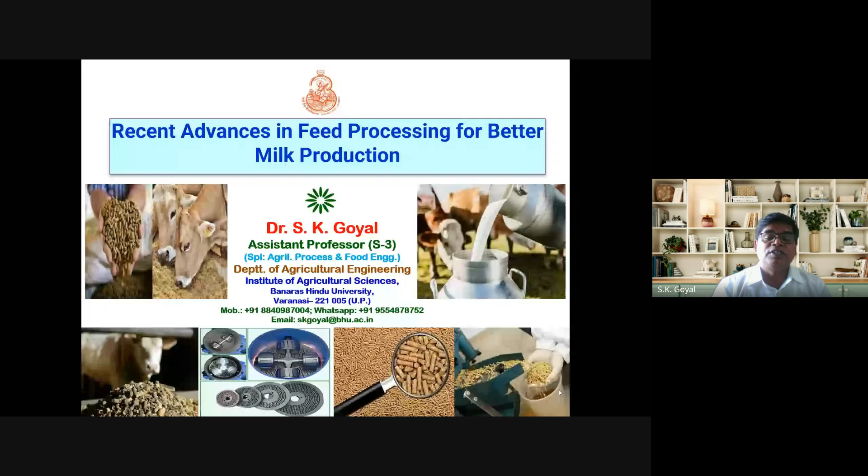As Dr. Anuradha told about my career, I am Dr. S.K. Goyal, working as assistant professor in the Department of Agricultural Engineering. In BHU, this department is known as farm engineering, and my specialization is agricultural processing and food engineering. I will be discussing some techniques of feed processing, how we can process feed for better consumption by cattle and other animals.

In this, I will be discussing animal feed technology, the history of feed technology, what development has taken place in India regarding feed technology, and the specific objectives of feed technology. Then I will also cover types of mills and mixers, and important machines covered by animal feed processing technology. Then a special technology known as pelletizing, then forage processing, and at the last the take-home message, the conclusion of my talk.

As I told you, India ranks first in milk production globally, and about 25% of global milk production was provided by our country during 2021-22. The milk production of India has registered about 58% increase during the last 9 years, because a number of changes are happening in our dairy industry, including feed technology, milking technology, and many other advanced technologies. That's why this huge 58% increase has been recorded. Between the years 2014-15 and 2022-23, it increased to about 230 million tons, in the year 2022-23.

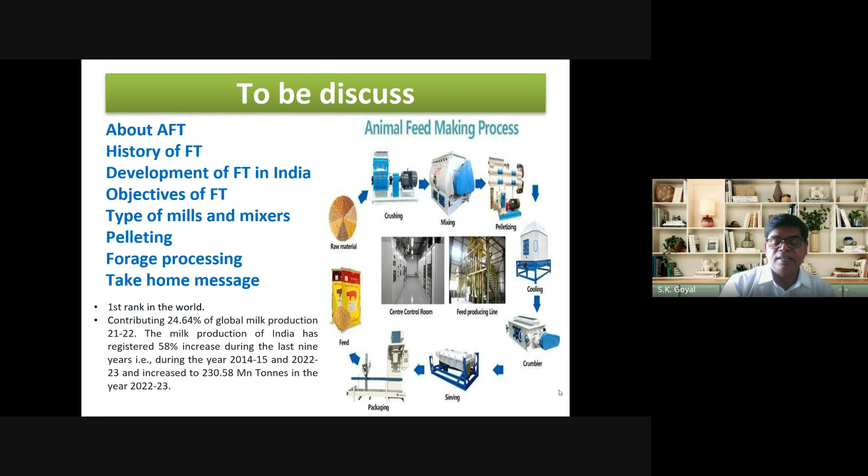So this is an important data, which is the base of our today's lecture. So let's start. What is AFT?

AFT means animal feed technology. We can define AFT as the application of physical, chemical, biochemical, biological, and engineering techniques to enhance the nutrient utilization of feeds and fodder in animal systems, meaning livestock and other things, improving the health and productivity of livestock. When we supply good feed to the animals, then definitely the health of that animal will be better, and only a healthy animal or cattle can give you better milk production.

Feed is the largest single item of expenditure in animal production. This is also an important thing. When we are talking about inputs of any production system, and when we are dealing with livestock and cattle or any productive animals, here we are talking about milk production. So feed is also a very large single item of expenditure. We, or dairy owners, are expending a huge amount for the feed of their animals.

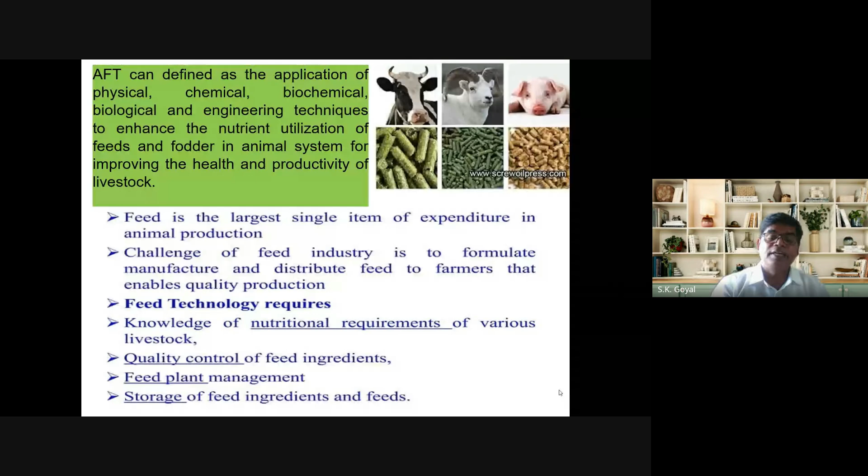Now, if we are discussing the history of feed technology, mills were first built for grinding wheat and maize for human consumption, not for livestock. In ancient times, generally grains or other consumable items were ground with a simple chakki, between two stone parts.

After some time, when the technology advanced, these mills were used for grinding maize especially, and waste material was dumped into the river at that time. That waste material may be converted into nutritional food using some advanced technologies. And chemical analysis gave good results, hence it got market value.

But there was variability in cost of product and quality of product, which led to the formation of AAFCO, that is the Association of American Feed Control Organization, which defined more than 230 different ingredients acceptable for sale in 1969 in the US.

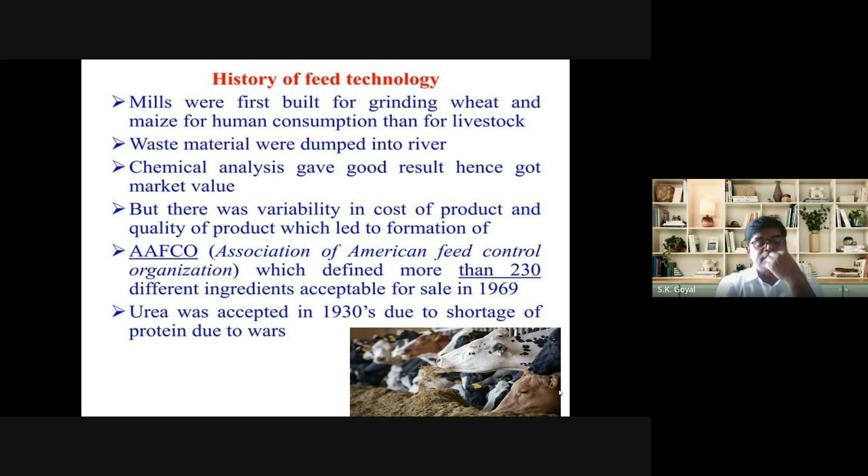Then urea was accepted in the 1930s due to shortage of protein due to war. So urea was used as an important ingredient for this feed system at that time.

As I told you, this is the definition. The subject of feed technology, which we are discussing at present, deals with processing of feeds, fodders, and preparation of formula feeds. As you all know, formula feeds means there are some specific requirements for any particular animal or breed. So when we are preparing some specific type of feed, that is known as formula feed, for which the knowledge of nutritional requirements of various livestock and poultry - I am talking about all animal types - quality control of feed ingredients, feed plant management, and storage of feed ingredients and feeds are essential. So all these words together create a definition of feed processing.

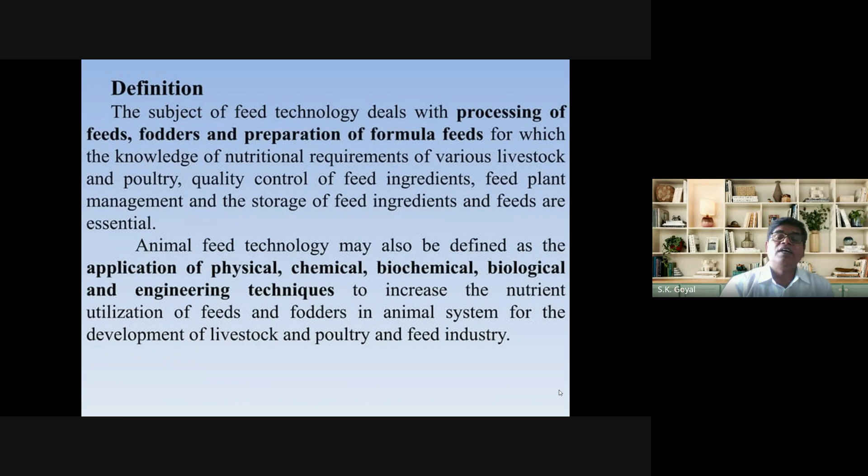There are a few facts about the beginning of the feed industry and related activities in the US, and I will also be discussing our country. In 1875, Mr. John Barwell initiated the production of calf meal at Blatchford of Waukegan, Illinois.

The American Feed Manufacturers Association, AFMA, was founded in 1909 in Wisconsin, and its name was changed to American Feed Industry Association, AFIA, in 1985. So there were some changes that happened from 1909 to 1985, and they changed the name of that organization. The Association of American Feed Control Officials, AAFCO, was also established in 1909.

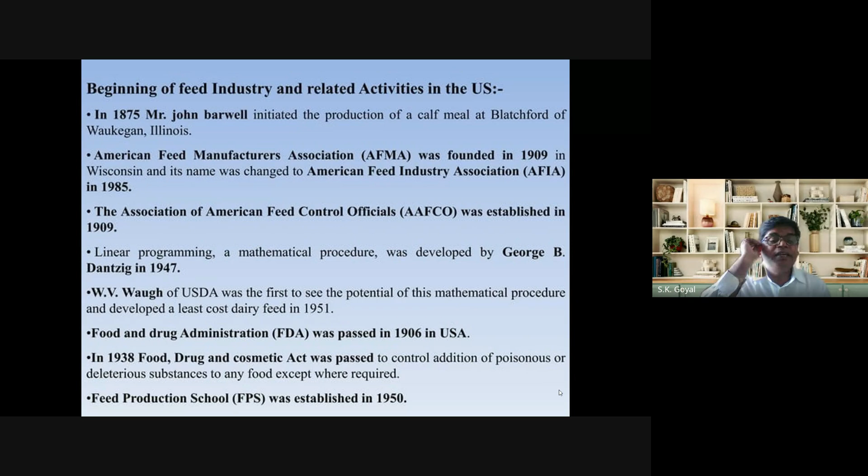The linear programming mathematical procedure was developed by George B. Dantzig in 1947 for the preparation of feed. Mr. Waugh of USDA was the first to see the potential of this mathematical procedure and developed a least cost dairy feed in 1951.

So I am just giving you the simple facts in bullet form.

Dr. Sunil sir, you are not audible. Is there any problem? No sir. Now it is okay, sir.

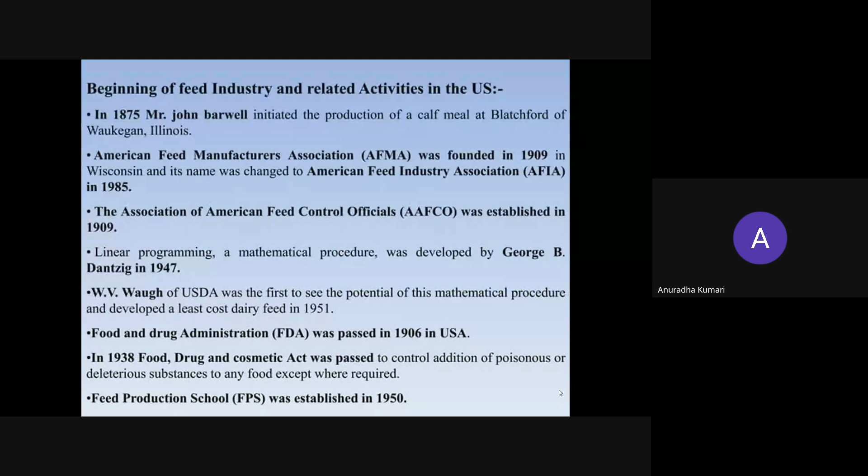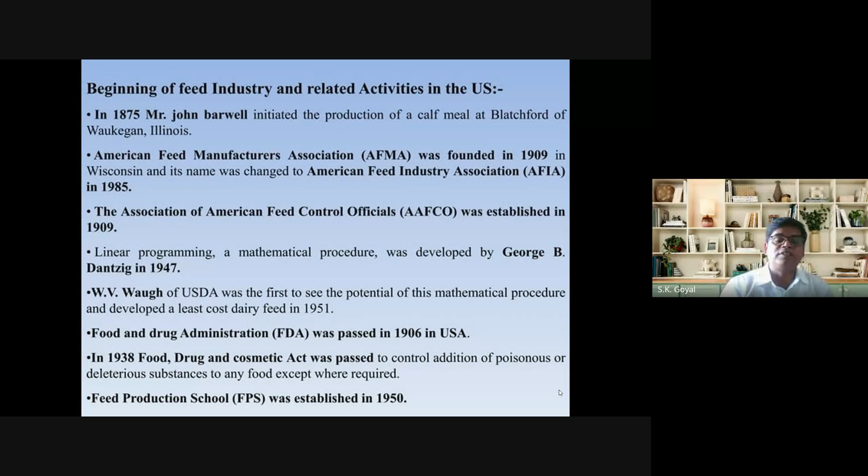Okay, thank you. The feed production school was established in 1950 in the US. Imagine, in our country at that time we were not even aware about agricultural production. The first agricultural university in our country was established in the 1960s at Pantnagar, near about the Green Revolution time. So about 10 years before that, in the US they had already established a feed production school to educate people regarding the feed industry.

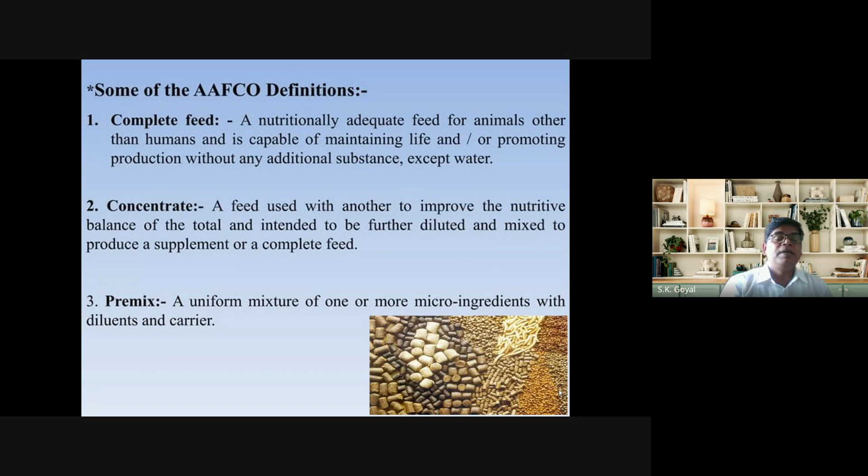So there are some AAFCO definitions, which I am not going to read out. There are different types of feeds available, like complete feed, concentrate, premix. You are all aware regarding these things.

Now I am discussing the development of the feed industry in India. Earlier I was discussing the beginning and development of the feed industry in the US; now I am talking about India. The first feed mill was established in India at Ludhiana, after the establishment of our first Indian Agricultural University at Pantnagar, which was established in 1960. One year after the establishment of that university, the Indian system established its first feed mill, which was totally responsible for feed production.

During early times, there were many constraints. When we start any new thing, there are a number of problems or challenges faced by the person handling all the matters. There were also challenges like high cost of ingredients, because during the 60s nobody was thinking about a feed system.

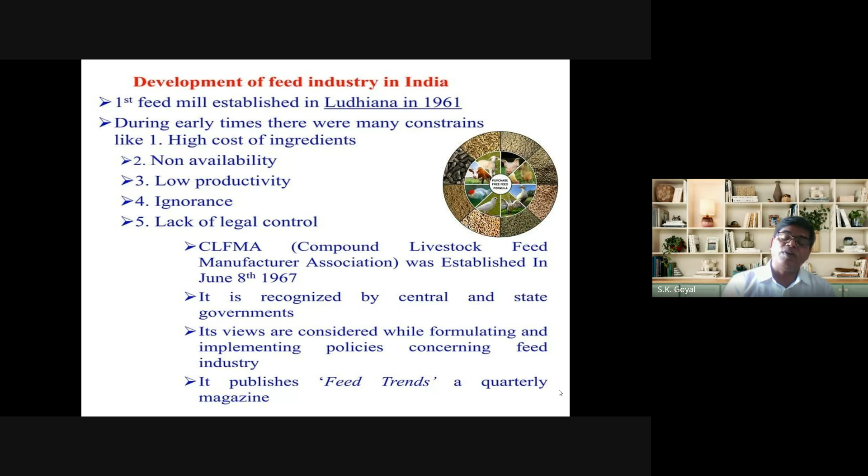After that, CLFMA was recognized by both central and state governments, and its views were considered while formulating and implementing policies concerning the feed industry. So CLFMA dealt with feed industry policies with both state and central government, and it also published 'Feed Trends', a quarterly magazine. These are a few facts regarding the development of the feed industry in our country.

At that time, CLFMA had different types of activities. As I discussed, it was recognized by both central and state governments. It conducted symposiums on feed-related problems and discussed them. It organized orientation courses at veterinary colleges for the benefit of students, because at that time the BVSc or MVSc syllabus lacked courses related to feed technology. So to bridge that gap, they started organizing orientation courses for the students.

It represents the problems of the feed industry to the government, like import duty rates, excise duty, and many other things. It also publishes the Feed Trends Quarterly magazine, and it has constituted awards to honor the nutritionists who contributed substantially to present day knowledge.

This is also a very important matter, because when a group of people or a single person, man or woman, is working in the nutritional field, or feed industry field, if that person or group is awarded or recognized by this or any organization, that is a very important thing for their encouragement.

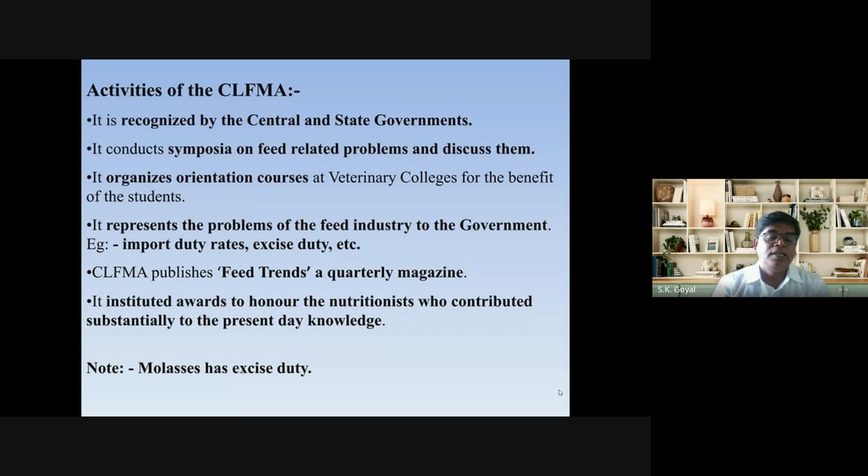Now, there are some specific objectives of feed technology, because without objectives we cannot reach our destination. There are certain objectives like to increase digestibility and utilization of our feed, and to improve content of nutrients, because as I told you, first I have to know for whom we are producing or developing the feed using different types of technologies. If we keep this objective in mind, then we can successfully reach our destination for feed technology.

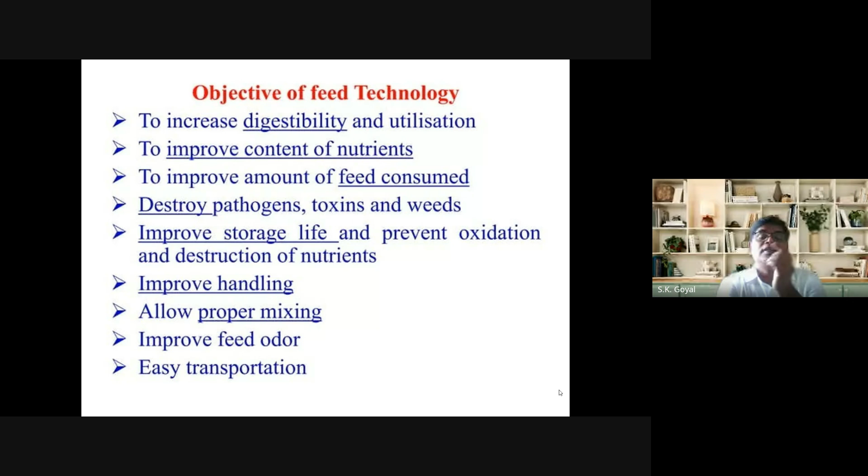Other objectives include to improve the amount of feed consumed, to destroy pathogens, toxins and weeds, to improve storage life and prevent oxidation and destruction of nutrients, to allow proper mixing, to improve feed odor, and to allow easy transportation. These are a few important objectives directly related to recent advances in feed technology for better production of any type of animal.

Now, processing of feed and forages. There are different advanced technologies available for the processing of feed and forages. First I am discussing primary processing technologies, like those aimed at making more profit.

Anyone doing any business does it to earn some bread and butter at the initial level, and after that, that organization or person does that work to earn more profit, or earn the benefit, you can say.

The second objective is to alter particle size. As you know, raw material comes in different particle sizes - maize is a bigger size, then barley and other feed raw materials have different sizes. If we can reduce the size of that particular raw material as feed, it will be beneficial to our animals, because reduced particle size is easier to digest and enhances digestibility. For example, grinding raw material like maize, wheat, gram, barley - whatever you give as a feed item in a ration to the animals.

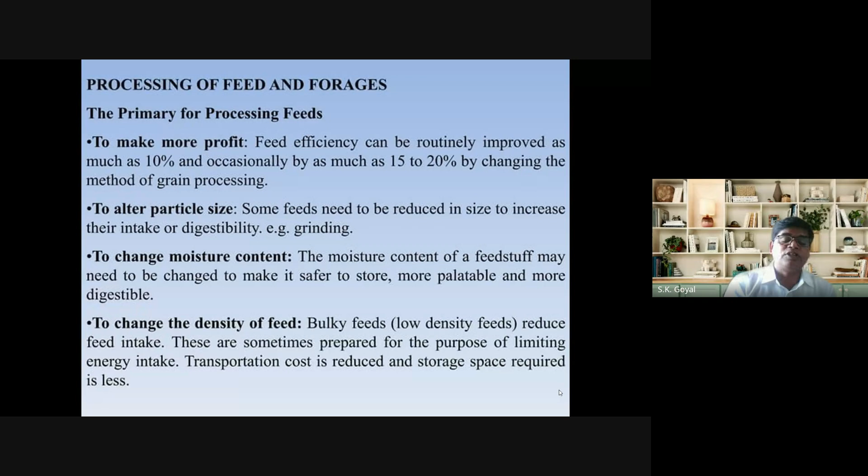The next one is to change the density of feed. As you know, raw material or raw feedstuff has low density, and when we process it through these primary processing methods, the density may increase. This is important for storage purposes also.

To change palatability - as I told you, if you grind it and add some molasses, flavor, fats and other ingredients, the palatability will definitely be higher. The next objective is to increase nutrient availability - for example, starch is 70 to 80% of dry matter, and protein appears less available in jowar than other grains, but new processing techniques produce dramatic improvement in the feeding value of jowar. If you add other ingredients to enhance palatability, digestibility, and nutrient availability, that is also part of primary processing.

This is also a system, or you can say unit operation, for the primary processing of feedstuff. Pelleting of feeds increases the utilization of phosphorus for chickens and pigs. So these are other things: to detoxify or remove undesirable ingredients from the feedstuff, and at the last, to improve keeping quality.

As I told you, high moisture grains may be preserved by either drying or chemical treatment. For good keeping quality, you have to reduce the moisture content of that feedstuff. So this is also an important point for the primary processing of feed.

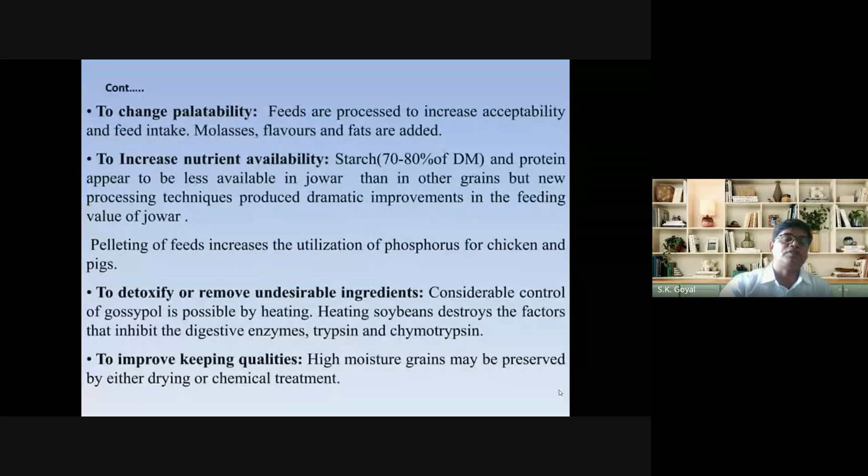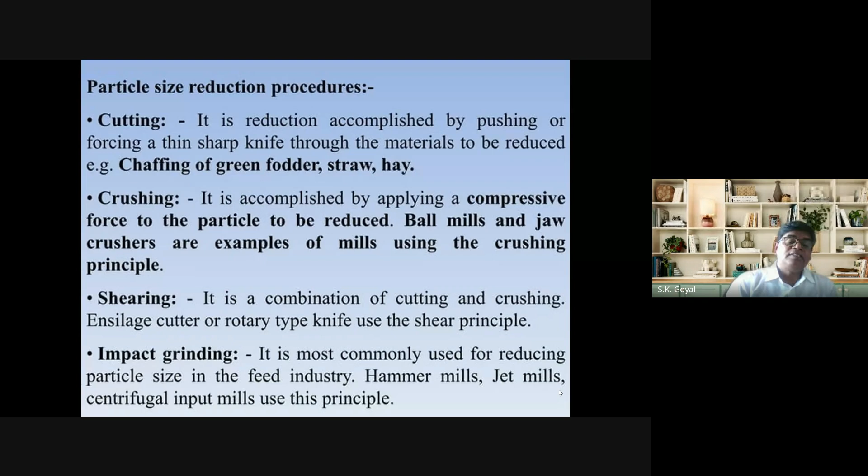Now, when we are talking about size reduction, or reducing the particle size, there are different techniques. Technical terms are used for the different machines, like cutting, chaffing of green fodder, straw, hay, and others. Then next one is crushing, next is shearing, next is impact grinding. These are technical terms, you can say principles. The machines are based on these principles, like hammer mill, burr mill, and other mills.

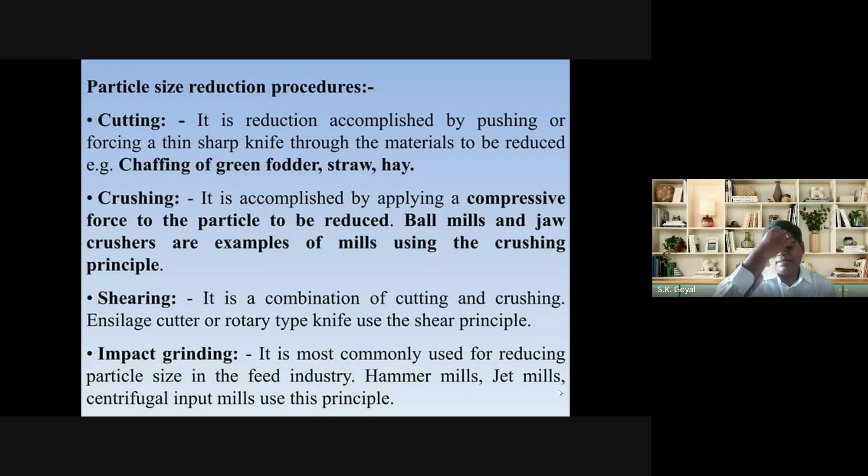So there are various treatment methods that are also useful in our feed industry, like physical methods. Physical methods means soaking, grinding, pelleting, extrusion, steam under pressure, and irradiation. These unit operations, or treatments, are important for the feed processing industry, and all these treatments come under physical methods.

There are other, chemical methods, like use of NaOH, anhydrous and aqueous NH3, then H2O2 and urea ammonia treatment of crop residues. When we are dealing with crop residues, and those crop residues are used as a raw material for the feed industry, then these chemical methods are applicable for better production of our feed.

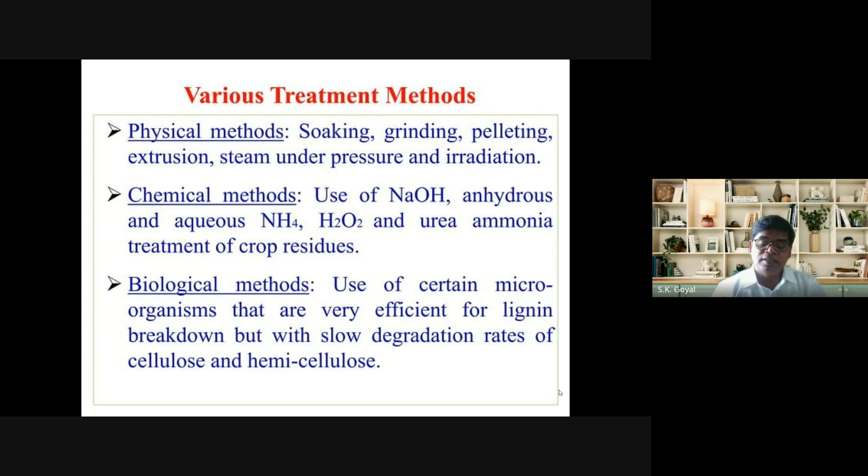Then at the last, biological methods: use of certain microorganisms that are very efficient for lignin breakdown, but with slow degradation rate of cellulose and hemicellulose. So for that, generally biological methods are applied in the feed industry.

I told you about shearing, impact, jet mills. For impact grinding, generally jet mills are used. In jet mills, the material to be reduced is carried in air or gas through a nozzle against an impact plate. The impact produces fine particles. So this is the principle, the technique by which the particles are reduced to fine particles.

The velocity of the jet usually corresponds to hammer mill peripheral speed, like 27,000 to 36,000 feet per minute. This is the speed of the jet mill. The efficiency of the jet mill depends on the velocity of the air or gas stream, the quality of the material being reduced, and the quality and conformation of impact surfaces. These points are responsible for the efficiency of a particular jet mill.

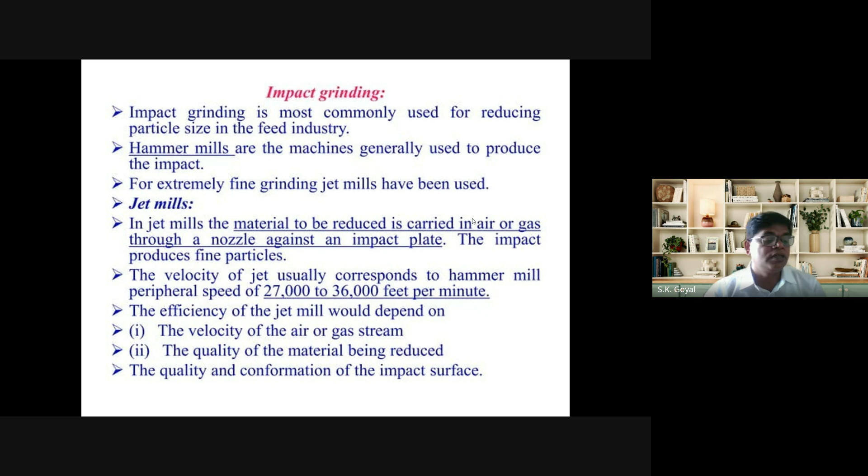Then another thing is the centrifugal impact mill. I'm not going to discuss all these things. Various steps are involved in feed compounding. There is a term known as feed compounding, and for that there are certain steps we have to follow, like selection of locally available ingredients based on price and nutrient density.

If we are going for feed compounding, we have to choose locally available ingredients, because their price may be less and the nutritional value may be high. Then quality check of raw material, because raw material is the base of your final product. If its quality is not up to the mark, your final product may not be of good quality. So it is essential to check the quality of raw material at the initial point for compounding of feed.

Then formulation of balanced ration. For that, you have to identify and calculate all your ingredients and what optimum ratio is applicable for the formulation of that ration. Then weighing of the ingredients, processing such as grinding, mixing and other things, and quality check of processed feed. Here again you have to check the quality of the processed feed, or the final product.

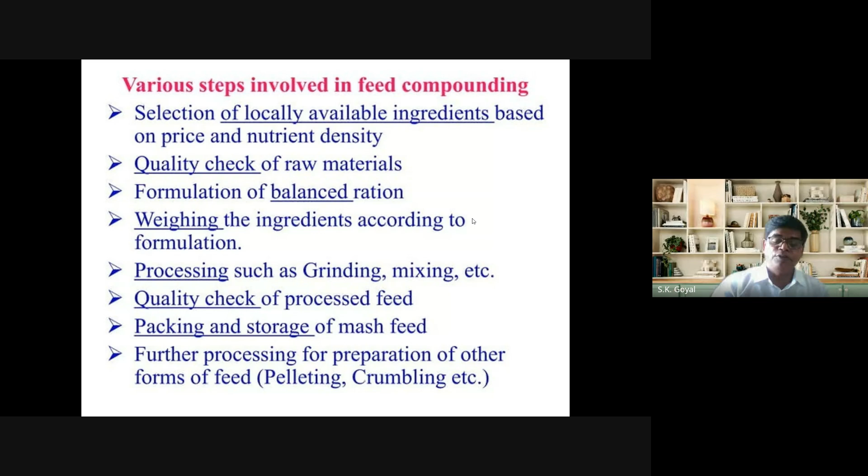After that, packaging and storage of mash feed. This is, you can say, the last step. But after that, you have to transport these processed products to other industries or the market. Then further processing for preparation of other forms of feed, like pelleting, crumbling, and other things. So these are a few steps important for feed compounding. Receiving of raw material, I am not going to discuss.

Grinding is the first and important processing method in the feed industry, and there are certain advantages. First, one minute.

Okay, I have 31 minutes left.

So there are some advantages of grinding in this feed industry, like the particle size reduction increases the surface area exposed to the enzymes, resulting in better digestion. When we reduce the size of any raw material which is used as a feed, then after reduction of the size of that particle, the specific surface area of that particular raw material has increased, and this is directly exposed to the enzymes, resulting in better digestion. Okay? That's why grinding is very important.

Next one is grinding helps mixing of ingredients as it prevents segregation. Without grinding, we cannot mix the ingredients in a better way, and the final product may not be of good quality if we are using the raw material without grinding. Okay? Then pelleting can be done only if the feed is ground uniformly. If we are going for pelleting, then without grinding the particles to a uniform size, we cannot have a successful pelleting system. Okay.

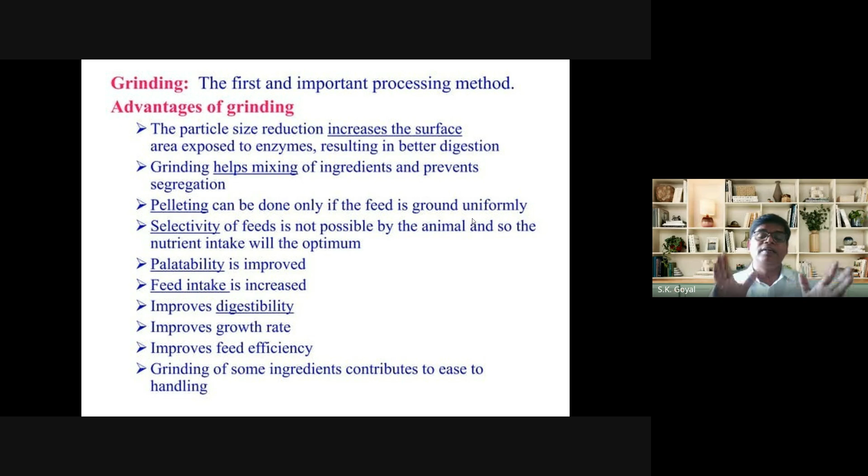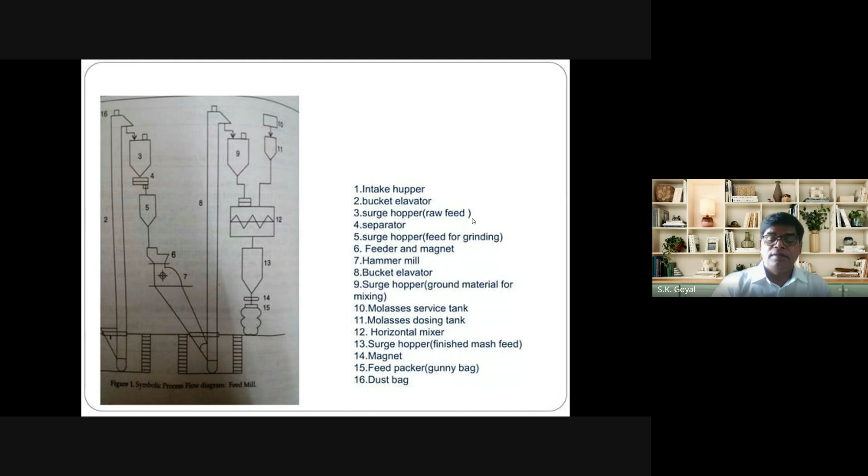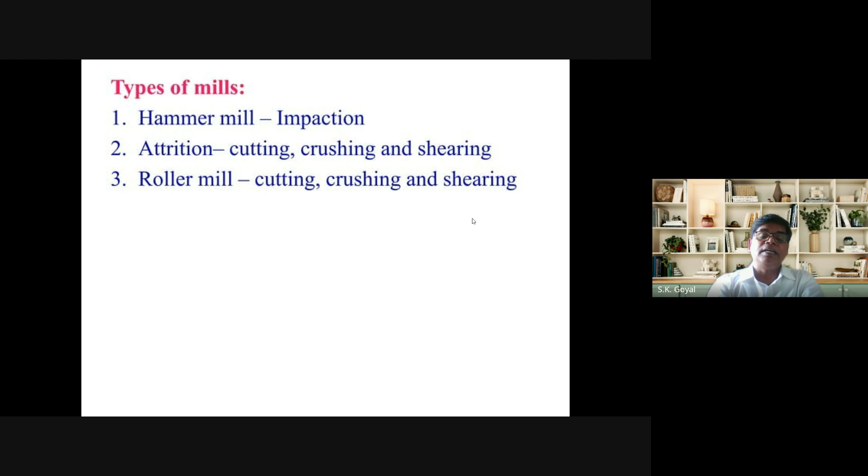The grinding of some other ingredients contributes to ease of handling. Ground material may be easily handled with a high density, and it reduces the storage space and other things. So this is a simple grinder, you can say feed mill. Then there are basically three mills used in our feed industry. First one is the hammer mill, and this works on the principle of impaction. Second one is attrition. This is based on cutting, crushing, and shearing. And last one is the roller mill. This is also covered by the cutting, crushing, and shearing principle. Okay.

So these mills use the impact grinding principle, as I told you, to reduce the particle size of feed. Hammer mills are used for grinding of both concentrates and forages. For both purposes we can use these hammer mills, and they have been used for farm, commercial, and custom grinding for many years. You can say this is the oldest mill used in our feed industry for grinding. Okay. The hammer mill consists of a cylinder or rotor, as I will show you in my next slide.

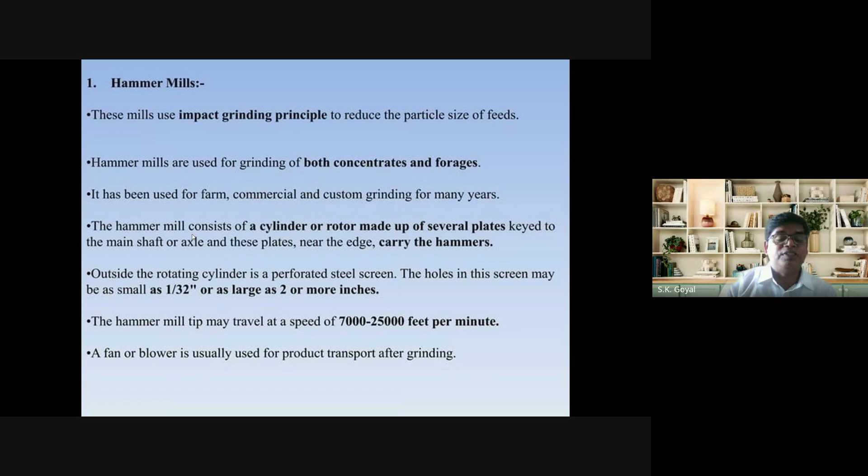These are the screen sizes. Different screens are used for feed processing of the different types of feed raw materials. The size of these screens is 1/32 inch to 2 inches. So 1/32 inch means the smaller one, and this one may be 2 inches.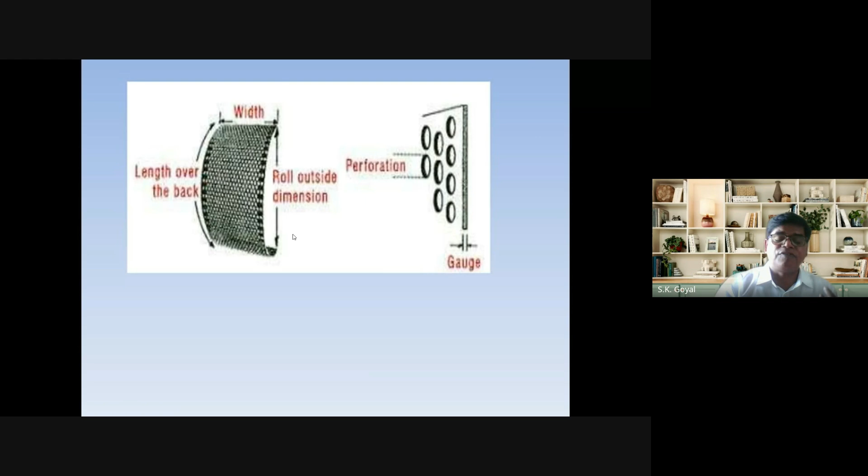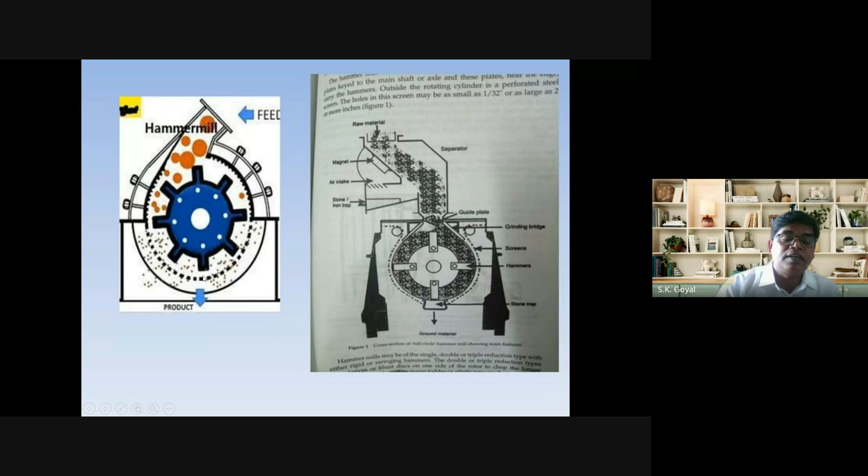Number of hammers: how many hammers are used in your mill. The size of the mill depends on the size of hammers. Then mechanical condition of the mill; for screens and hammers, sharper corners are more efficient. The last one is HP of the motor, meaning the size of the motor, calculated in horsepower. The compatibility of the electric motor should be with your mill. The motor size should be matched with your hammer mill.

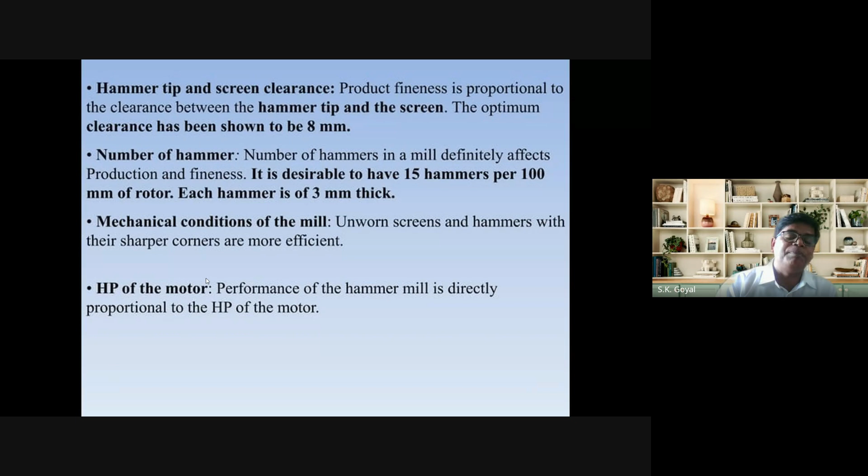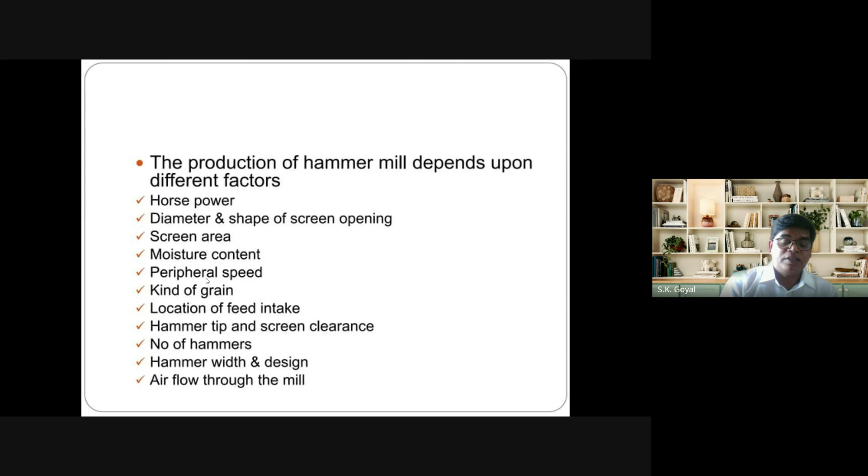So the production of a hammer mill depends upon different factors, as discussed earlier in bullet form: horsepower, meaning the power requirement, diameter and shape of screen opening, screen area, moisture content, peripheral speed, kind of grain or feed, location of feed intake, hammer tip and screen clearance, number of hammers inbuilt in your machine, hammer width and design, and air flow through the mill. These are important factors responsible for better production of feed through the hammer mill.

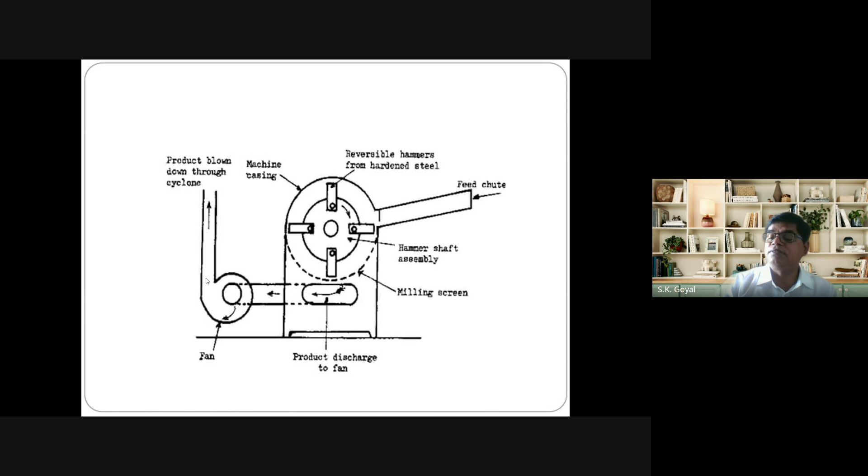This is the total view of the hammer mill. I am not discussing more because only 19 minutes remain for this talk.

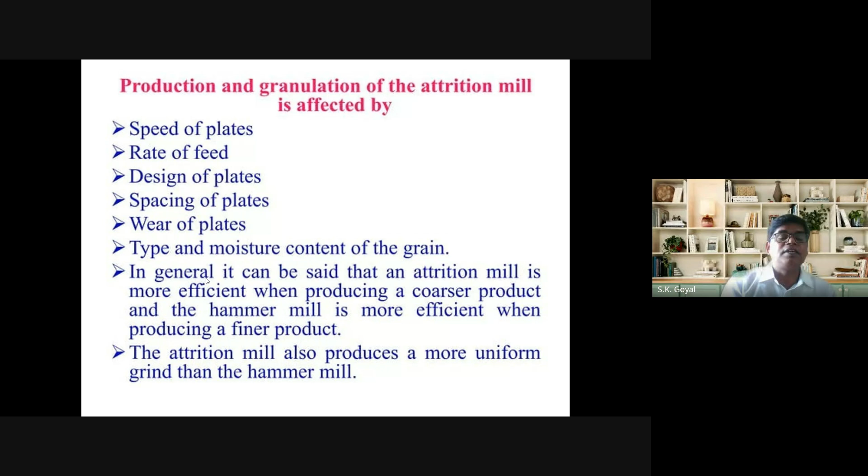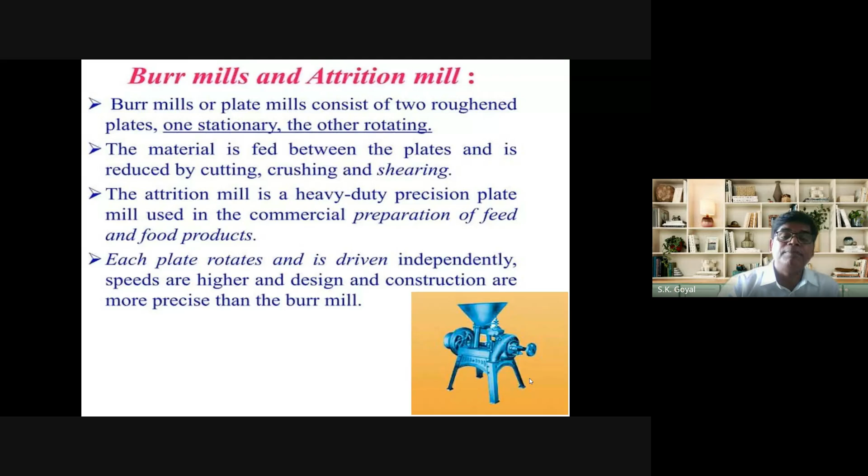Then the last one is the roller mill. These are used in feed processing for crimping or crushing of the grain. The burr or attrition mill and this roller mill depend on the same principle. So this is crushing.

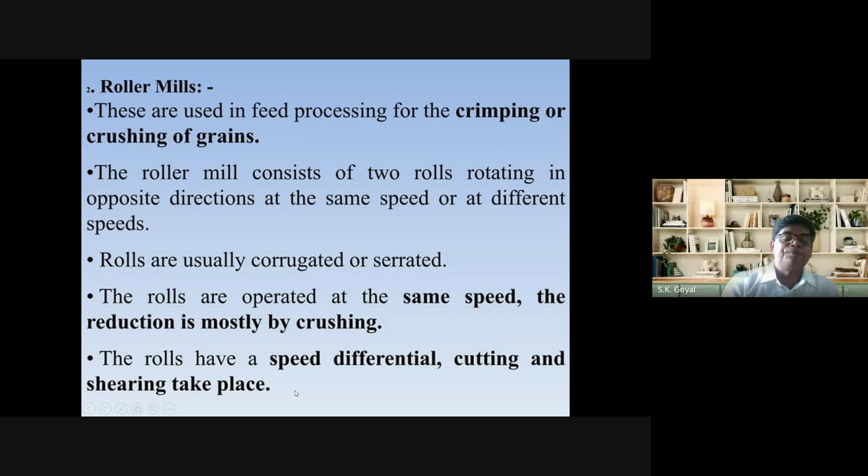This is the feed unit. Here the raw material is fed. After that, it goes down by gravity force and passes. You can control your feed through this roller, you can say roller feeder, and these are the first pair of rolls. Here, your feed comes into contact with the first roller, and they reduce the size.

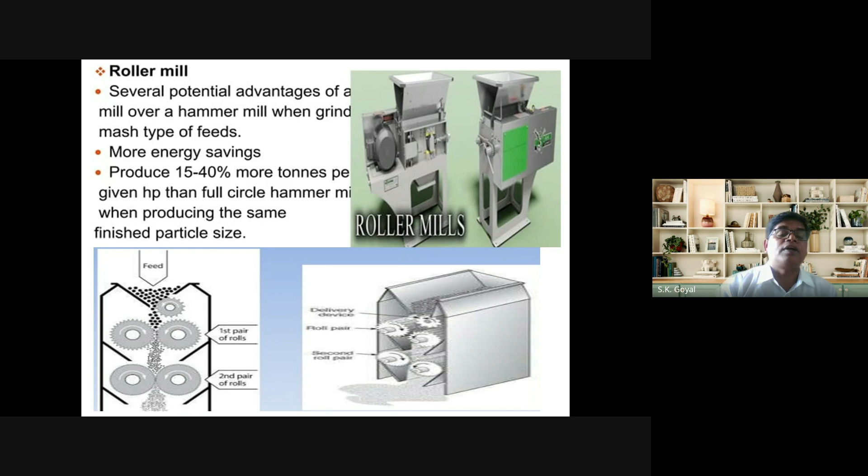Then, if you need this size of your feed, you don't need to go for the second pair of rolls. If you need more fine particles, then you go with the second pair of rolls. Okay. After that, at the bottom, you get the final product. Okay. So these mills we are using for the feed industry.

We need to mix that material to formulate different types of our feed, like feed mixing, hand mixing, and mechanical mixing. So feed mixing means mixing of the raw material. The process of uniform distribution of the different feed ingredients in the compound is known as feed mixing. Okay, simple. When we use our hands to mix anything, in the same manner we do this work by a mechanical method, with the help of machines, or if we have a small amount, we can do this work by our hands.

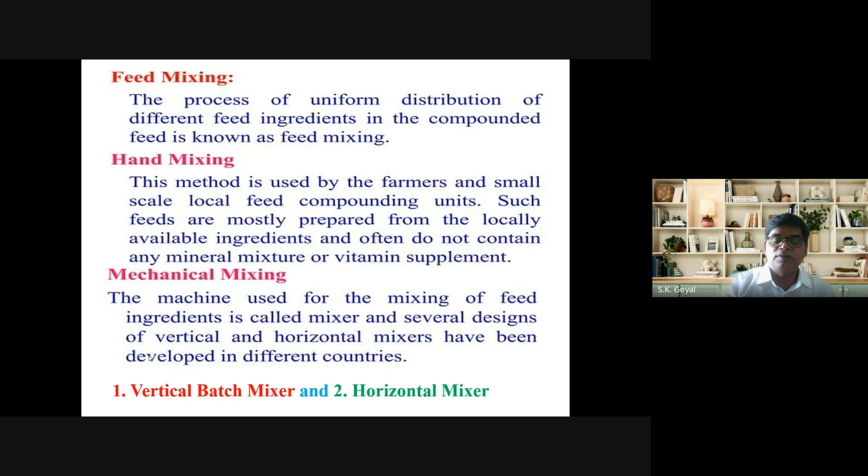Okay, so if we go with the mechanical mixing method, there are two types of machines available. The first one is the vertical batch mixer, and the second one is the horizontal mixer. Okay, the first picture is showing the vertical batch mixer. This is the hopper. Here there is a screw conveyor type system. Here you feed your ingredients, and it mixes and collects it into this chamber, you can say collection chamber. So this is known as a vertical batch mixer, and this is a batch type machine.

This is the horizontal mixer. Here you can see there are helical type screws, and there are different types of plates, steel plates. Those are used for mixing your ingredients. So these two types of mixers are commercially used in our feed industry, especially the Indian feed industry.

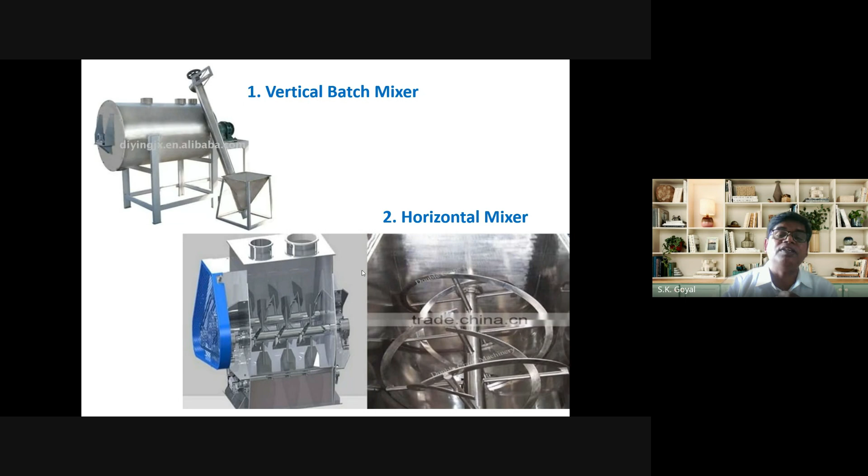Okay? So here is a comparative analysis of the two mixers, vertical mixer and horizontal mixer. Here you can see the relative cost of the vertical mixer is low, and it does a good job for dry mixing. And the horizontal mixer is expensive and does a good job for both dry and liquid. So you have to choose which type of ingredients you are going to mix, so that you can choose vertical or horizontal. Then, the vertical mixer is not used in larger feed mills, but the horizontal mixer is used in small mills and larger feed mills. It is applicable in both.

Then floor space. The vertical mixer uses less floor space, and the horizontal definitely uses more floor space. The time it takes is near about 20 minutes, versus 3 to 5 minutes per batch. So the vertical mixer is slow, and the horizontal mixer is very fast. The power requirement of the vertical mixer is less, and the horizontal mixer is more. For discharge, the vertical mixer opens at one place, and the horizontal mixer opens at several places along the bottom, so there is more discharge area.

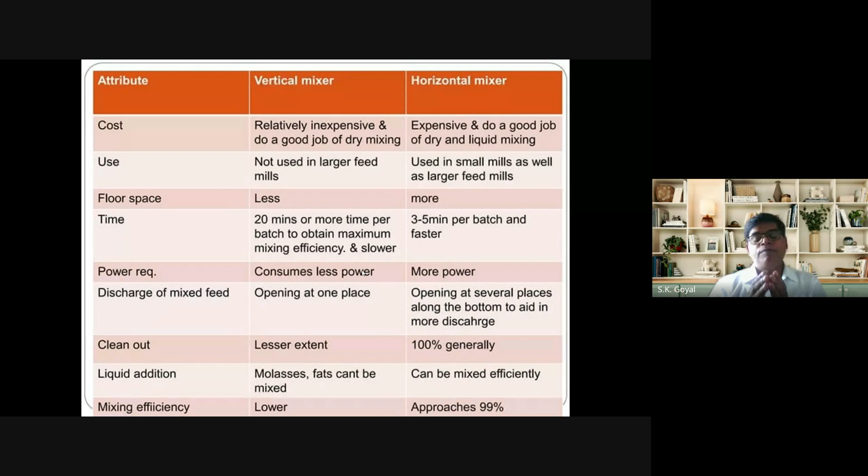Then clean out is to a lesser extent in the vertical mixer, and generally 100% in the horizontal mixer. For liquid addition, in the vertical mixer molasses and fat can't be mixed, but in the horizontal it can be mixed efficiently, and the result is much better. Then mixing efficiency is lower in the vertical mixer, and the horizontal mixer approaches near about 99%, so it is better than the vertical mixer. So one can choose a mixer based on their individual requirements. Then, determination of feed mixing efficiency of a mixer, production per hour.

So there is a simple formula. Production per hour is equal to 60 into E into F divided by A plus B plus C plus D, in tons per hour. So what is ABCD? A means filling or feed loading time in minutes. B is feed mixing time in minutes. C is emptying time after mixing in minutes. D is dead time in minutes.

E is the loading capacity of a mixer in tons. F is the efficiency index, which depends on the use of the mixer to its maximum capacity with minimum cycling time. So the production of mixed feed per hour, that is 60 minutes, will be determined by the following equation. This is a simple formula, with the notations as I described. If you are going to mix any ingredients using any mixer, you can simply calculate the feed mixing efficiency of that mixer.

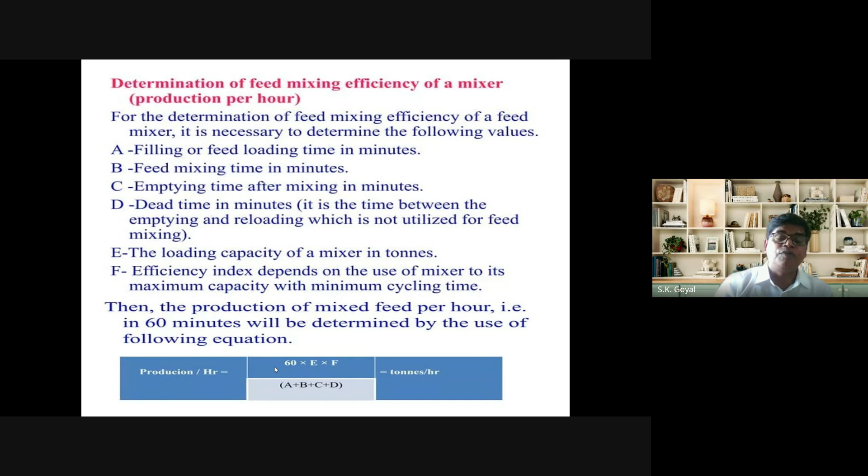Now, processing methods of grains. I am going a little fast. For processing grains, we use two types of methods: dry processing and wet processing. In dry processing, grinding, dry rolling, popping, extrusion, micronizing, and roasting are the main methods. For wet processing, we generally use soaking, steam rolling, steam processing and flaking, pressure cooking, exploding, pelleting, and reconstitution. These are a few important processing methods for both dry and wet.

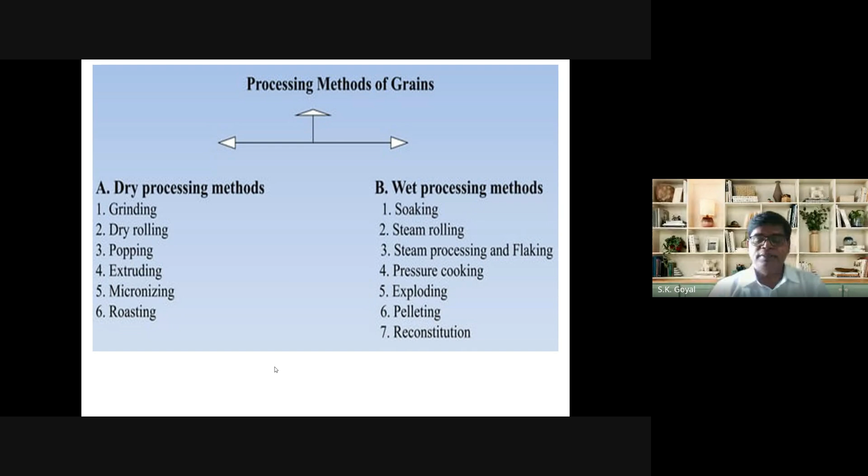I am not going to discuss each one because there is very little time. Then, pelleting of feed. Pelleting is an important unit operation to convert raw feed or a feed mixture into pellet form, and pellets are very important to animals. The densification of a single feed, concentrate mixture or complete feed into a cylindrical shape is known as pelleting, and the compressed or agglomerated feed thus produced is called a pellet.

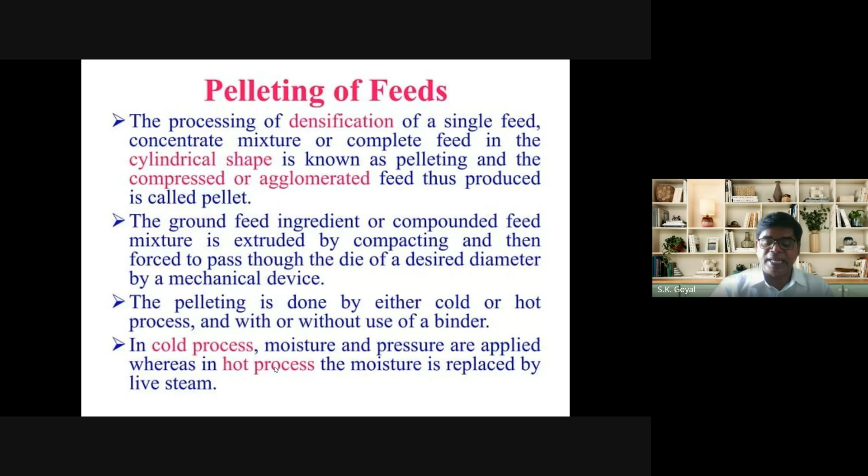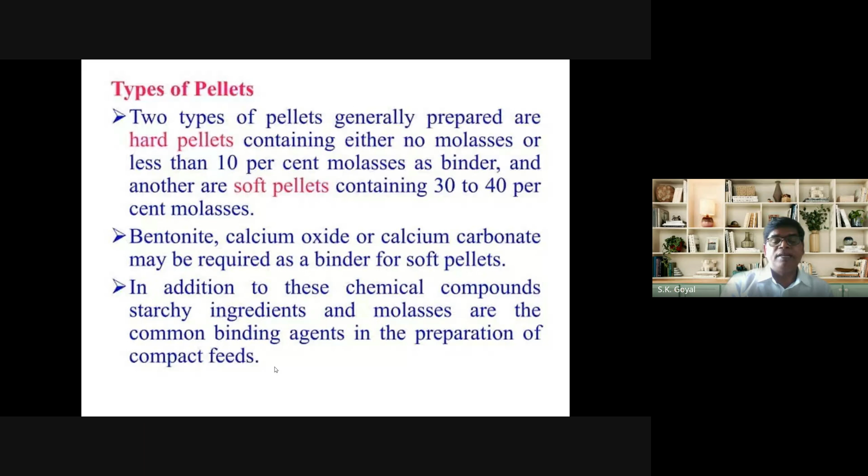In the cold process, moisture and pressure are applied, whereas in the hot process, the moisture is replaced by live steam. There are two types of pellets: hard pellets and soft pellets. Generally, bentonite, calcium oxide, or calcium carbonate may be required as a binder for soft pellets. In addition to these chemical compounds, starchy ingredients and molasses are the common binding agents applicable for this pelleting system.

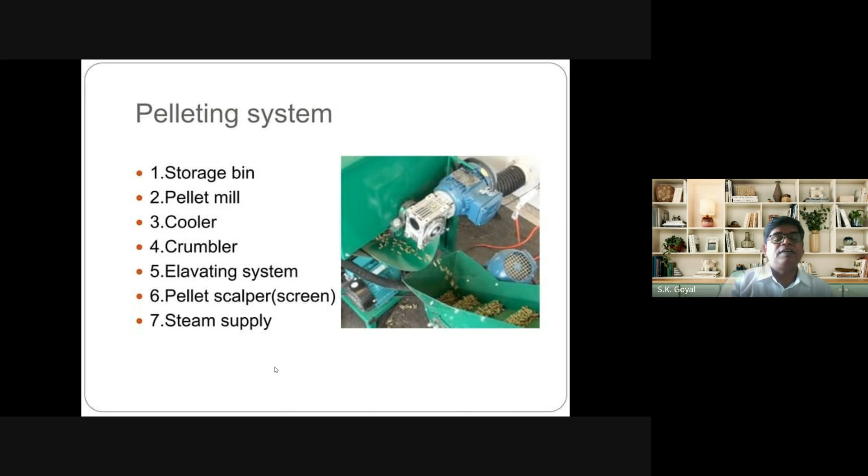I am giving you the flow diagram. First, the storage bin. Then the raw material goes to the pellet mill. After that, it goes to the cooler, then to the crumbler. Then the elevating system, then the pellet screen, and last the steam supply. After following all these 7 steps, we can obtain a pellet.

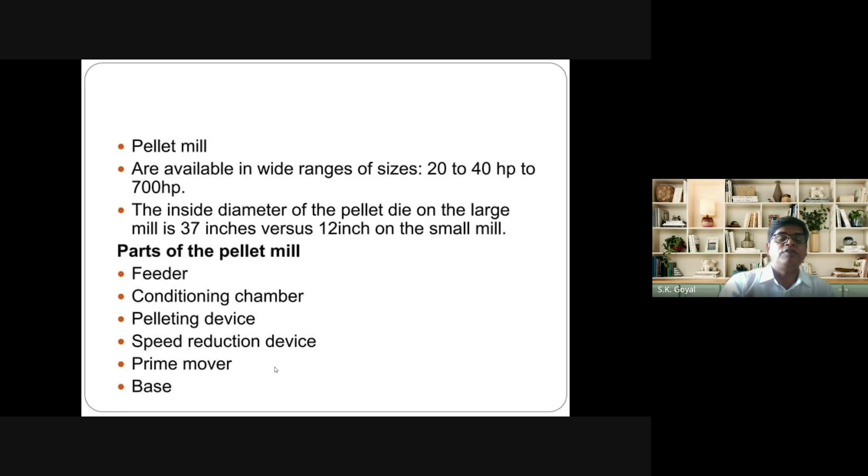The parts of a pellet mill are the feeder, conditioning chamber, pelleting device, speed reduction device, prime mover, and base. Generally, electric motors of 20 to 40 HP up to 700 HP are used to operate these pelletizers. A simple sketch diagram is here. This is your feed. You can fill the feed into this feeder.

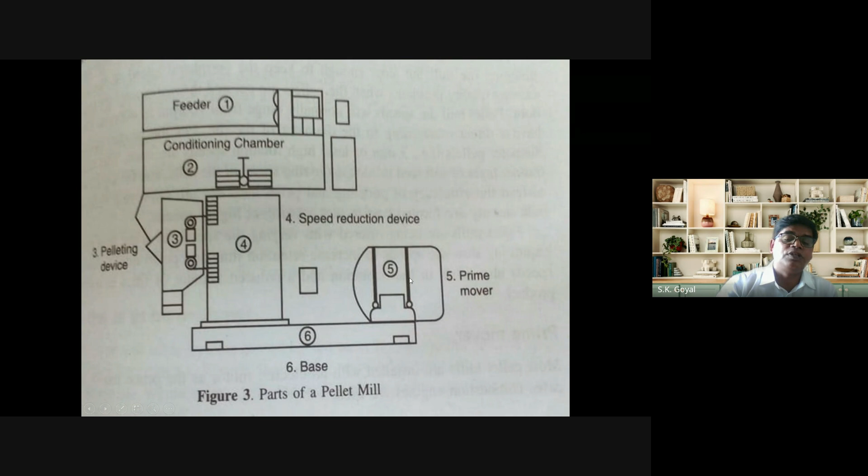Second, the material comes to the conditioning chamber. After that, the pelleting device, which produces the pellet. Then the speed reduction device, where you can control the speed of pellet production. And here is the prime mover, which is used to remove the pellets from this place. And the sixth one is the base of the machine.

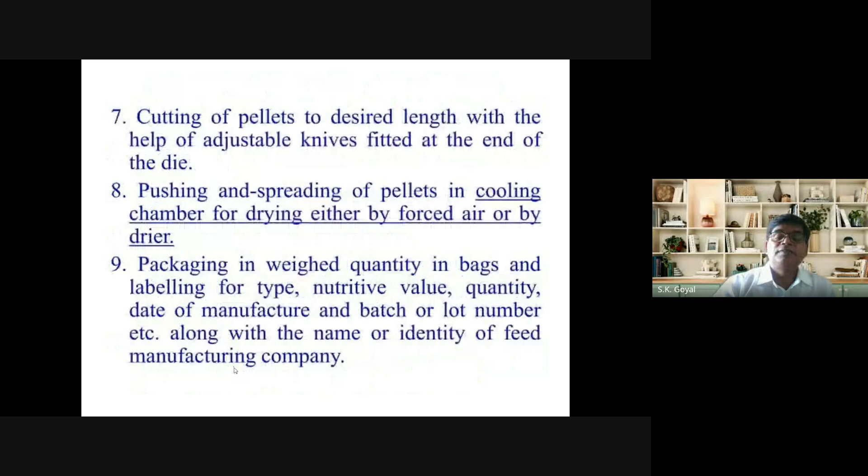So, steps in the preparation of hard pellets. I'm not going to discuss more things. Then, advantages of pelleting.

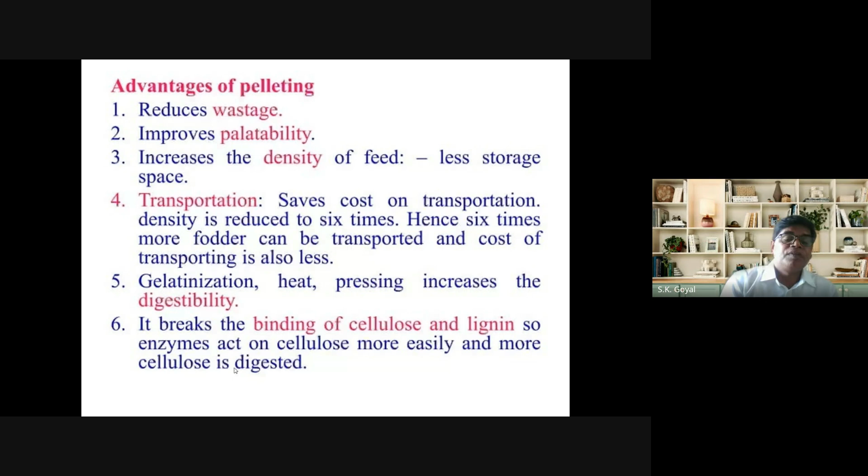It reduces wastage because we can also use the residuals or raw material, waste material or byproducts of your agro industry. It improves palatability, increases the density of feed, and less storage space is required when we convert our feed into pellet form. It is helpful for transport, and it increases digestibility. It breaks the binding of cellulose and lignin. So these are a few important advantages.

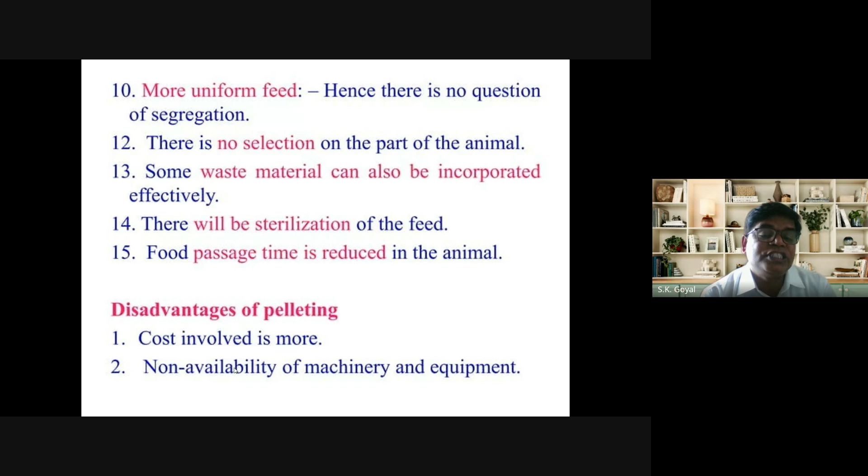And then it can give a more uniform feed. There is no selection on the part of the animal. And some waste material can also be incorporated effectively. If you are having a byproduct of another crop residue, then you can use it as an ingredient, and it can be converted into pellets.

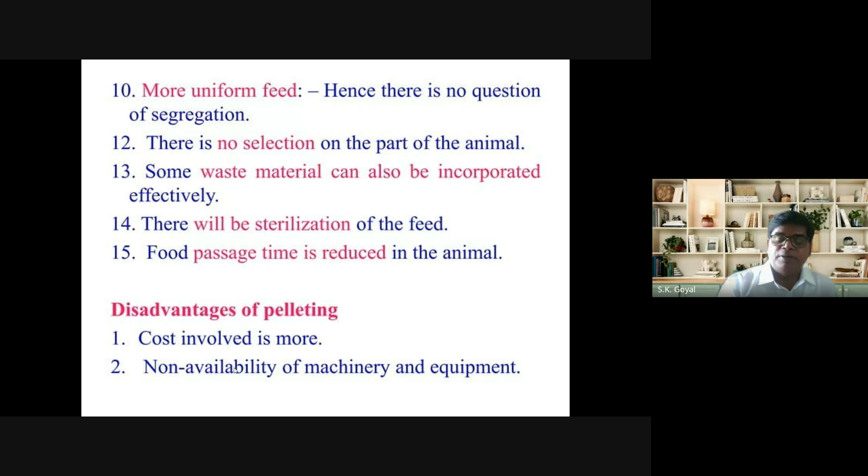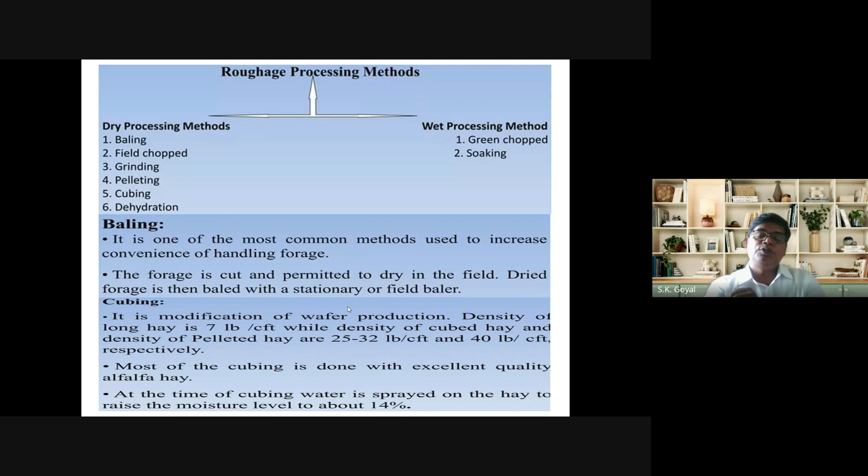Then at the last, roughage processing methods. First we process our grain, and for the roughage processing method, generally here we can also use two systems, dry and wet. For the dry system, we should use baling, field chop, grinding, pelleting, cubing, and dehydration processing methods. And for the wet processing method, we should use green chopping and soaking. So these are the two basic methods used in roughage processing.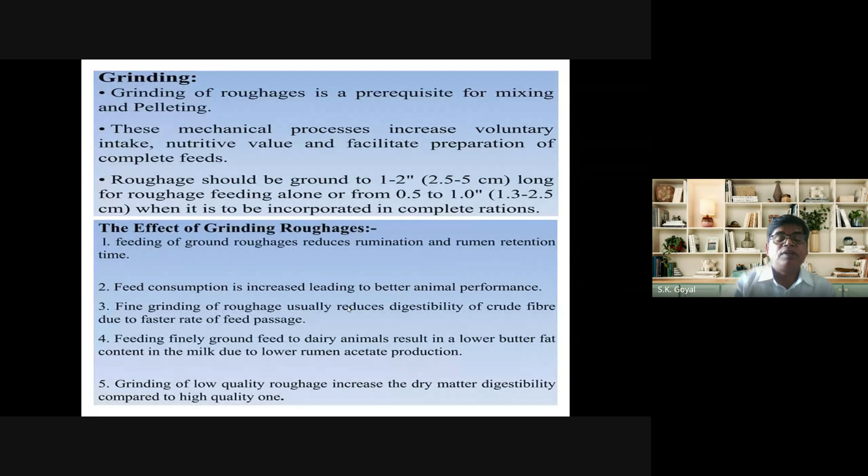Then grinding, as I discussed regarding grinding of our grains, here the forage can also be ground with different techniques, like feeding of ground roughage, reducing rumination and rumen retention time. When we supply ground roughage to our animals, it is easily digestible. Then dehydration, then pelleting of roughages—we can also convert that roughage into pellet form.

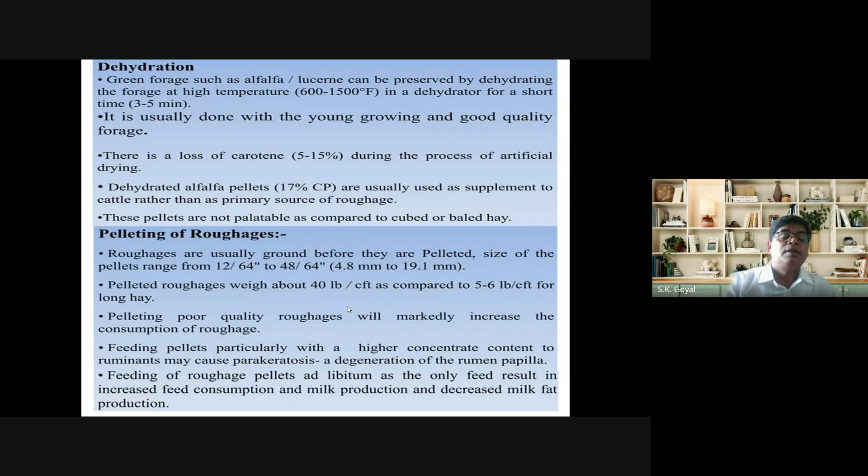Then, methods of improving the nutritive value of poor quality roughages. When we are talking about advanced technologies in feed processing, we have to think about these things: poor quality roughages can be enhanced by physical methods, chemical methods, physicochemical methods, and biological methods. For physical methods, the classic figures are soaking, chopping, grinding, pelleting, wafering, steam under pressure, and irradiation. For chemical methods, alkali, ammonia, acids, salts, gases, and oxidizing agents can also be used for the improvement of roughages.

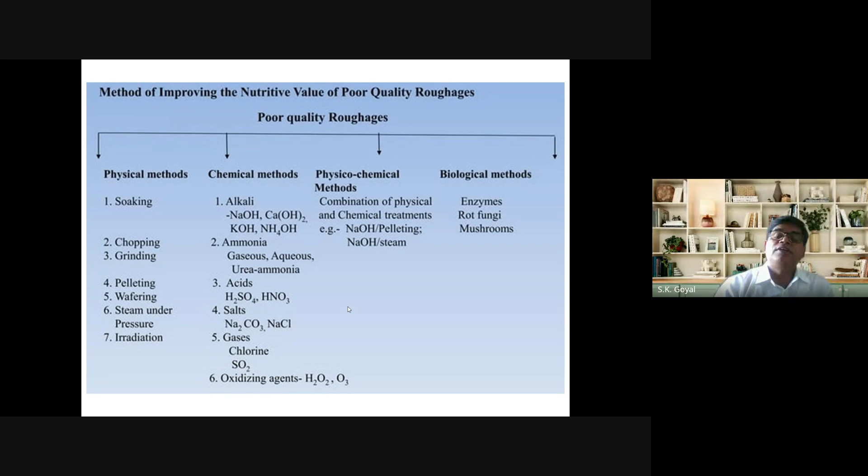And for physicochemical methods, it's a combination of physical and chemical treatments, like NaOH pelleting and NaOH steam. And at the last, biological methods—generally we are using enzymes, rot fungi, and mushrooms for the betterment of roughage processing.

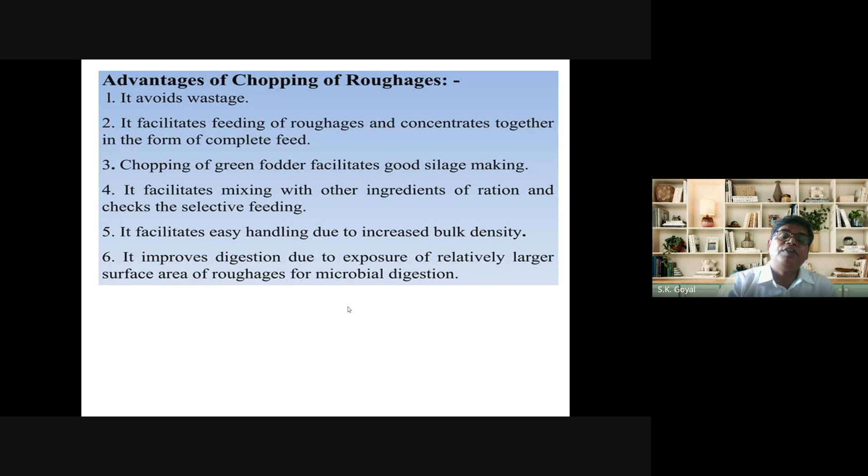Then there are a few physical treatments. Time is going fast, so I'm not covering all of these. There are some advantages of chopping roughages, like it avoids wastage and facilitates feeding roughage and concentrate together in the form of complete feed. So there are other advantages too.

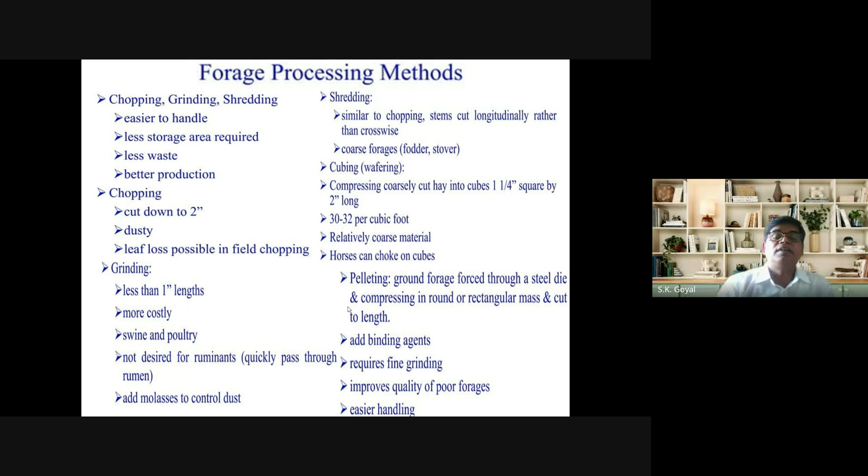Then forage processing methods, as I told you, shown in a tabular or graphical form. So this is another system. Here you can use chopping, grinding, and shredding.